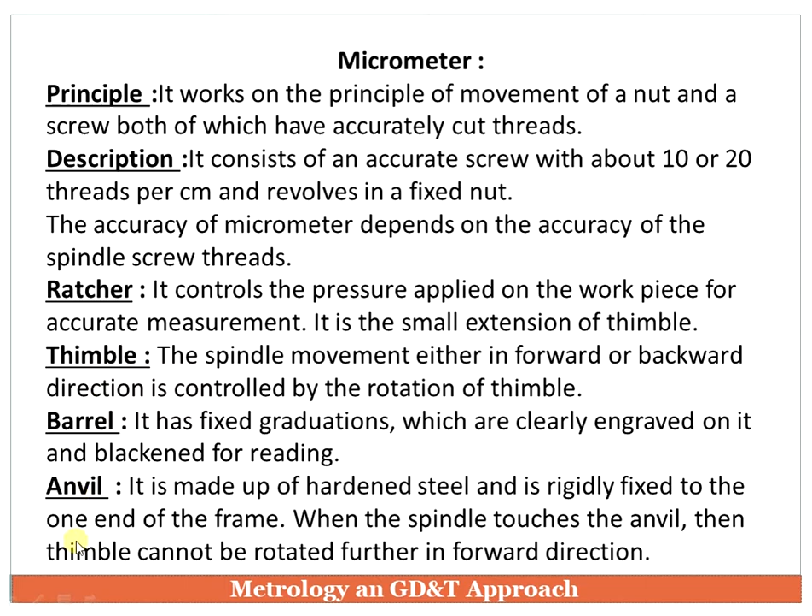So different parts of micrometer if we try to discuss, first one is ratchet. Then we have thimble, barrel and anvil. Instead of going in this theoretical part, I will directly show you the image and its detail. So a C-type frame is present on a micrometer. With that, this is the spindle which is the movable part, and this is the anvil, which is coated with a carbide tip, both for spindle as well as for anvil, to avoid the wear and tear, or we can say for minimum wear and tear.

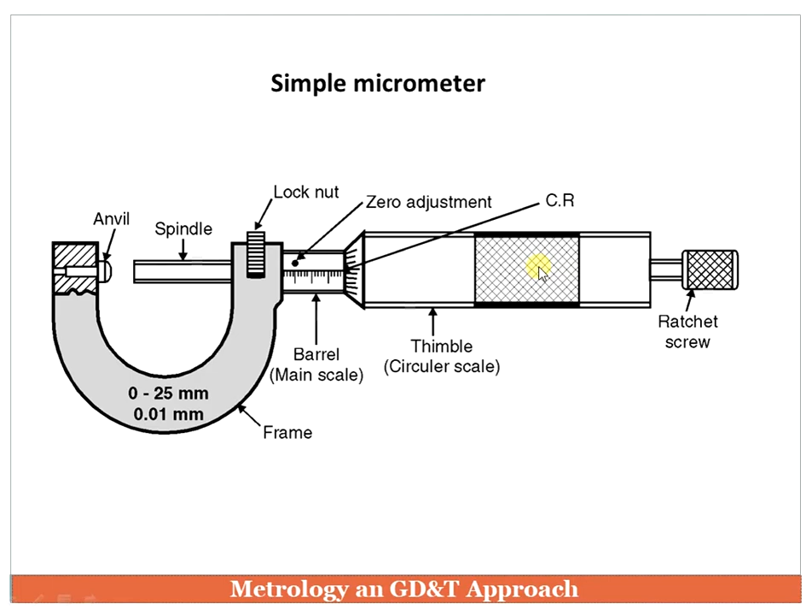Then we have a lock nut over here which fixes the reading when we have taken it. Then whatever graduations present over here has some sort of a range. There are different types of simple micrometers which have a range of 0 to 25 mm, and we have a least count starting from 0.01 mm. So this will be the main scale, we call it a barrel, and a circular scale with a screwing action which can be rotated will be called a thimble. It has some graduations as well. Then we have a nut part to support the rotation, and then we have a ratchet screw to adjust the pressure while taking a reading.

Now how to go for a reading? Before that we'll try to understand the least count as we discussed in the earlier session of vernier caliper. So the thimble, which is the movable part on a circular scale, is divided into most probably 50 equal parts, and every fifth graduation is numbered from 0 to 50. With that we have a barrel with graduations. Most probably two-sided graduations are present, which will provide us the smallest count on the main scale as 0.5 mm. So 0, 1, and in between we have one graduation of 0.5 mm distance.

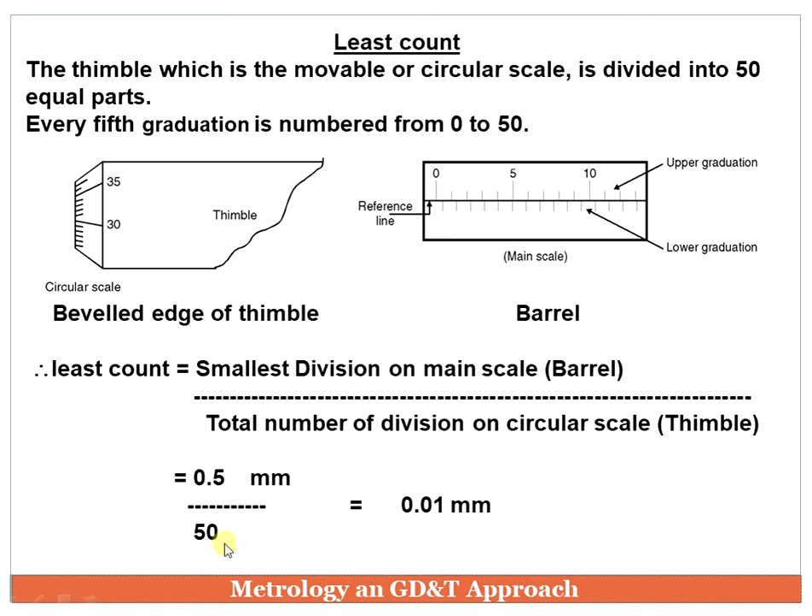So least count for micrometer will be smallest division on main scale divided by total number of divisions on the circular scale, which we call the thimble. So 0.5 divided by 50, so least count of micrometer is 0.01 mm compared to vernier caliper. Now main scale and least count. Now if we try to take a reading, total reading will be main scale reading plus circular scale division into least count of this micrometer.

Now whatever is visible over here we can try to understand. So 6 mm, 7, 8 likewise we have over here, and the division which is matching, 15, 16, 17, 18th number, will be physically matching with this axis over here. So 6.3 and its half, so 6.35 will be our main scale reading, plus 18th division into least count, so total reading will be 6.53.

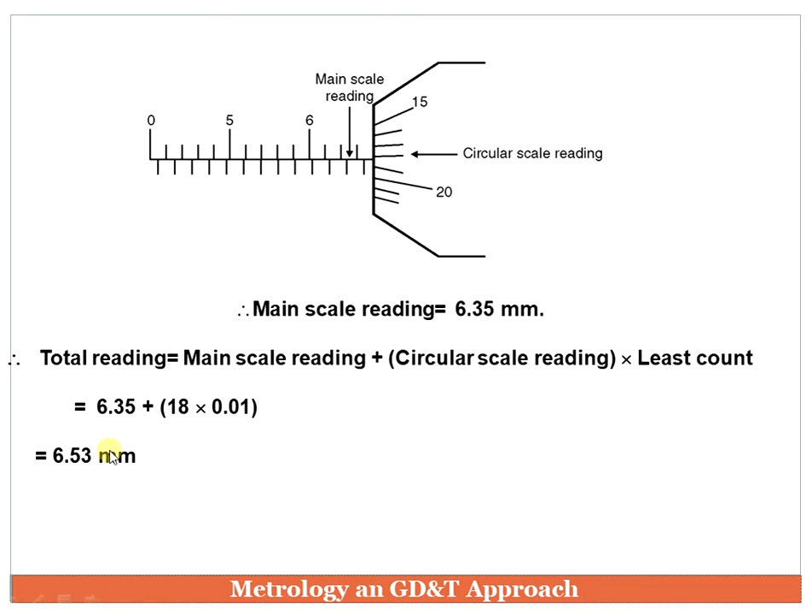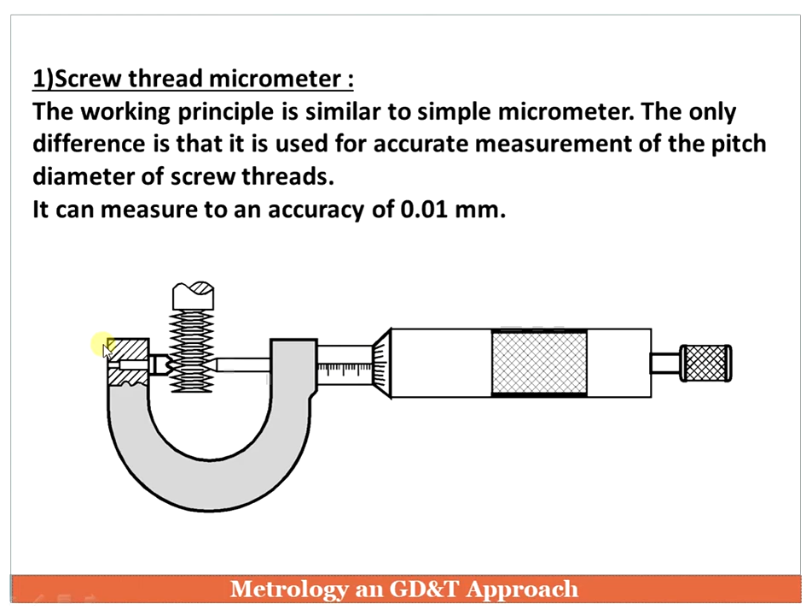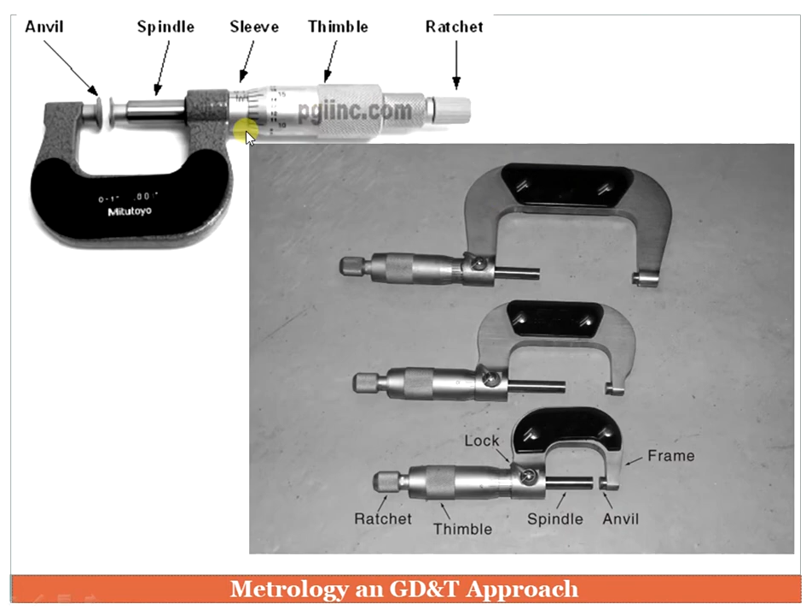Similarly, micrometer can be used for other types of parameter measurement, so first we have a screw thread micrometer, in which the spindle and anvil will be converted into a screw pattern. Other parts of the screw thread micrometer will remain similar. So an actual micrometer will look like this with different ranges. This is the smallest one, this will be second range, third range. So how will this range vary? 0 to 25, 25 to 50, 50 to 75, and it will continue further. So these are the actual anvil, spindle, sleeves, thimble, ratchet, etc.

Now we also have a digital type of micrometer, which will provide us the reading directly in the form of digits. Instead of ratchets we have a reset switch in case of digital micrometer. It is used where high accuracy is required, and since it is based on electronic technology, the reading can be taken directly. Obviously this will also depend on the screwing action itself. The least count of this is 0.001 mm, so we have greater accuracy for these types.

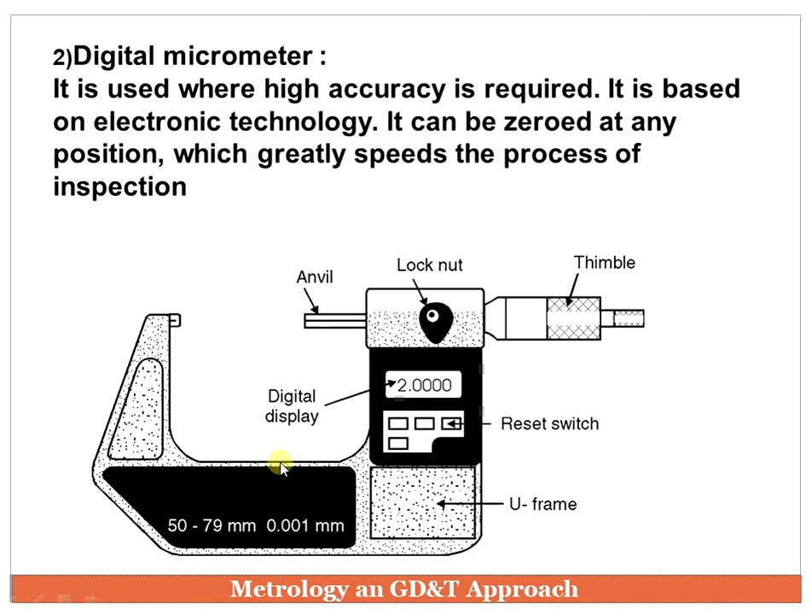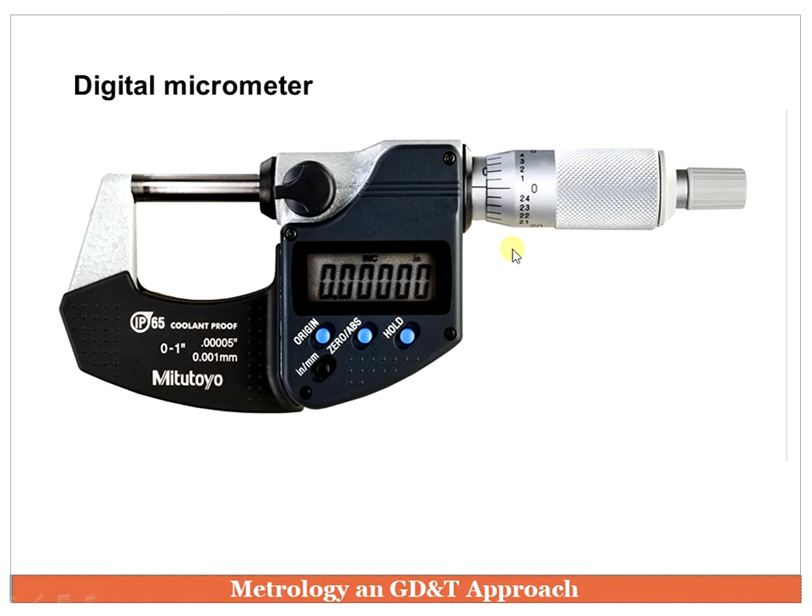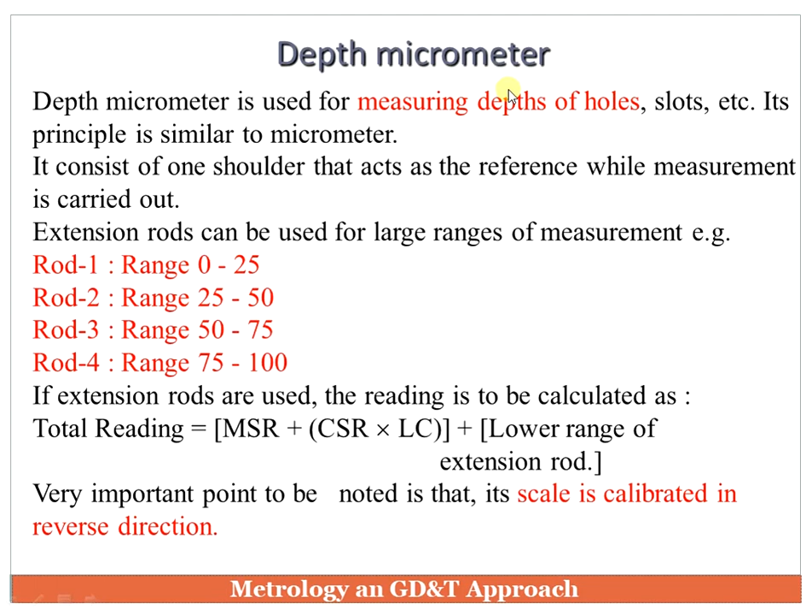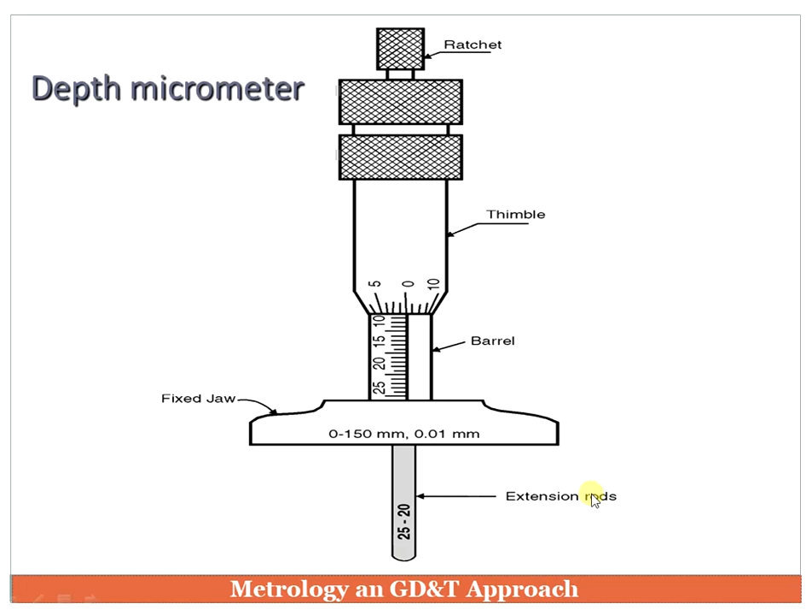Depth micrometer can also be used if you have to measure a depth; we have a similar classification. Reading procedure is the same. The most important application of depth micrometer is to measure the depth of holes, slots and so on. So it will look like this. Other parts like barrel and thimble will be similar. Instead of anvil, we have an extension rod over here. So actual depth micrometer is like this. The left side is the mechanical type, and towards the right side we have digital types.

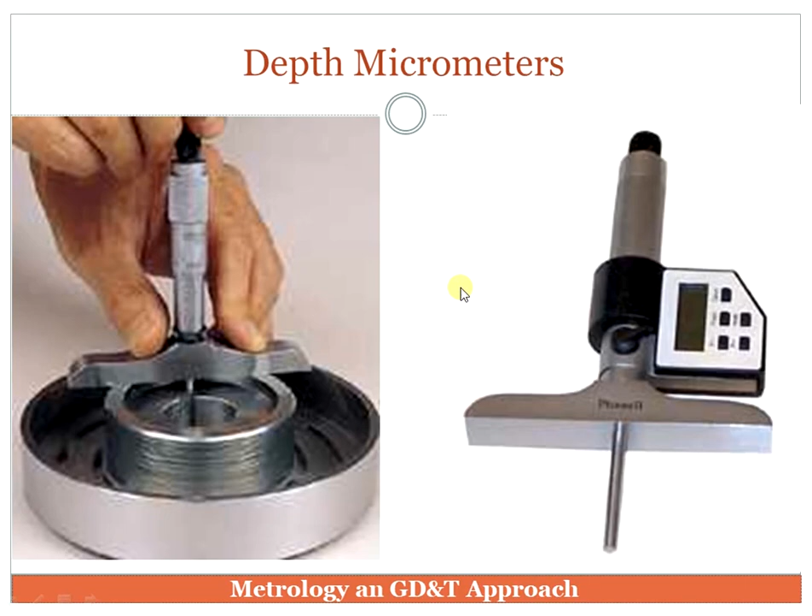So this was all about the digital and micrometer basic concepts. We'll try to understand a few more instruments and a few more concepts related to metrology.